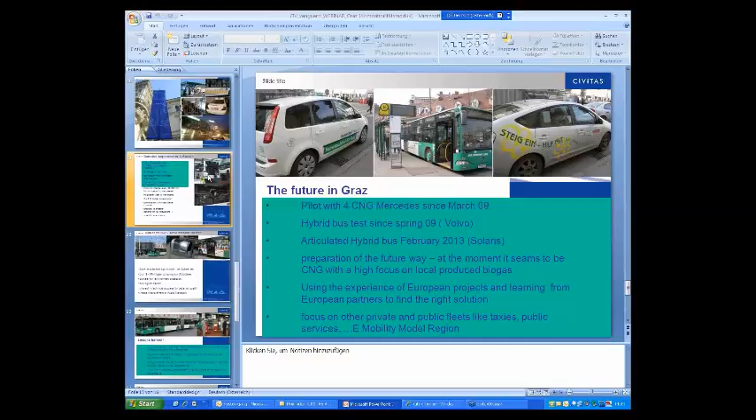Okay, just a moment and go to the full screen.

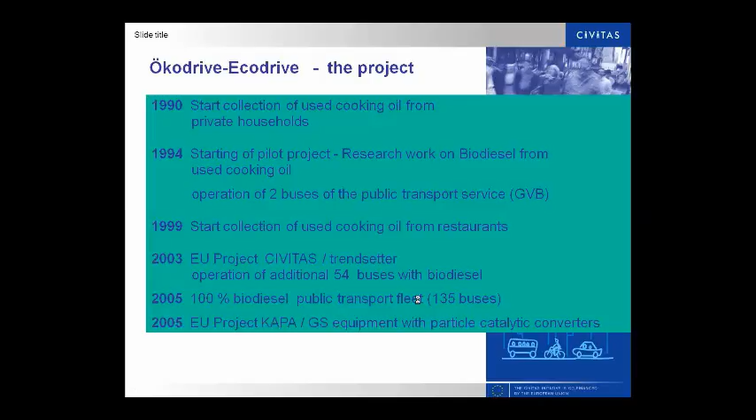And you see it, I don't know, do you have from my screen also this? I think I have to clear this part. Maybe it doesn't work. So maybe you can make it smaller. That also doesn't work. So maybe you don't see all my pictures.

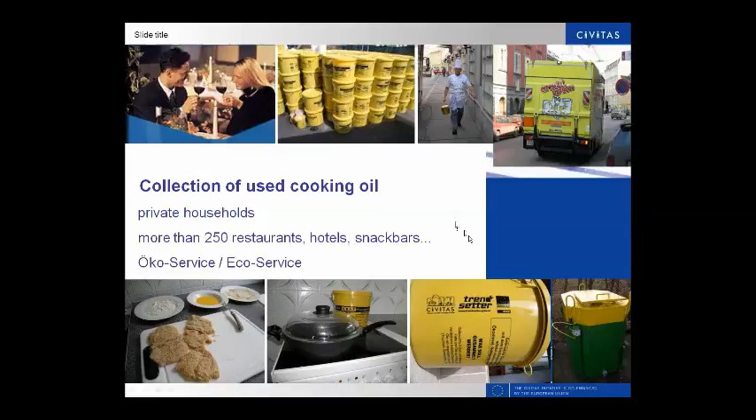I don't know. Anyway, you see on the right side there is a bigger collection equipment which also can be heated, and this is the collection equipment for restaurants. So just to see how it runs, and we have already about 250 restaurants where we collect our used cooking oil. So what's now? Doesn't look okay.

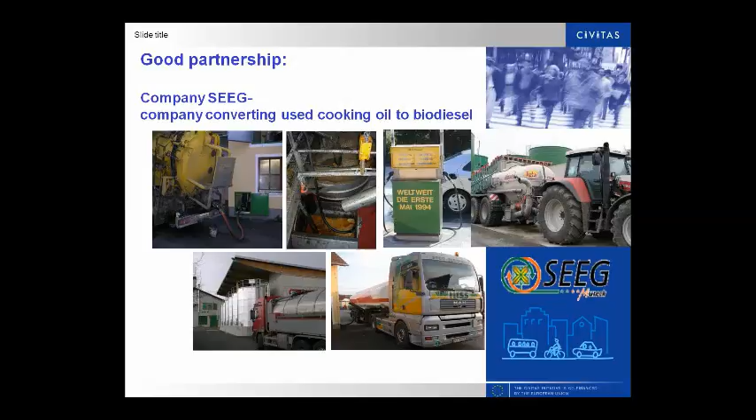So at the end, such a project means you need a good partnership with other partners, and one of the partners is the company who produces the biodiesel. Also some images here of where the collected cooking oil is brought to a company about 40 kilometers south of Graz, and they produce our biodiesel in this company.

We had also research behind it, and also a company that produces the plants for the production of biodiesel, which is BDI, also situated in the surroundings of Graz, and as I said, the cooperation with the Chemical Institute of the Technical University, and the city-owned transport company in Graz. Just some impressions. As I explained before, Professor Mittelbach, who was something like the Pope of biodiesel in Graz.

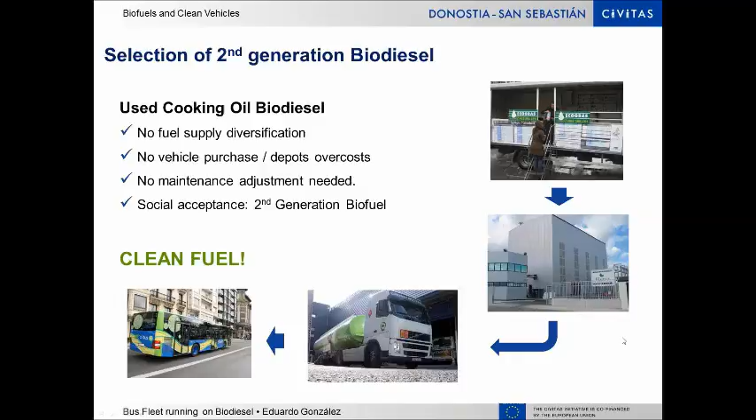We started with CIVITAS at the end of 2008, and the first thing we did was purchasing a fuel mixing station, so we were able to blend the biodiesel directly to the buses. We already had 2 underground tanks of 60,000 liters each, and we dedicated one to the biodiesel, the B100, and one to the diesel.

In 2009, we started to apply, I would say, the CIVITAS schedule of blends, but we went always forward to this schedule, and we applied blends to the whole fleet. We started from 16%, as we see here in the graph, and through the years we reached an average. This graph is for an average blend. So this means that here at the end of last year we reached 35%, but in this 35% we had

the main blend in the 120 buses was the B30, 30% of biodiesel and 70% of diesel, you know. But we also had vehicles at B100, totally with biodiesel. Those were, I think, 12 vehicles, and also B50. We had vehicles with B50.

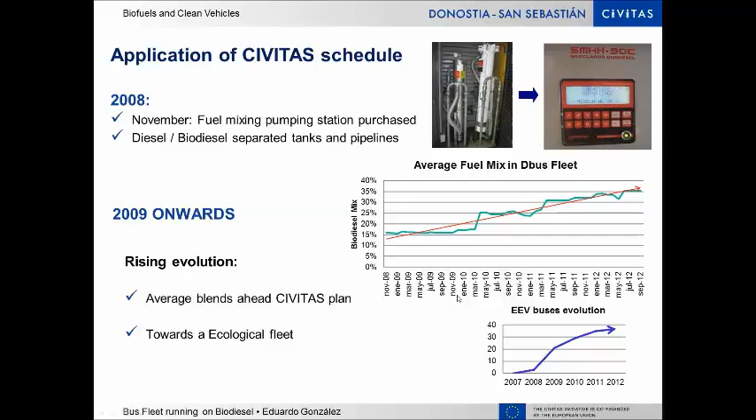We not only did apply this biodiesel; during these 4 years, it's important to notice that we also had a high renewal of the fleet, and we purchased up to 39 EEV standard vehicles, you know, which is an optional standard that goes toward the Euro 5, the obligatory Euro 5. Okay.

Talking about the steps or the keys of the application of the biodiesel, in our case it was to obtain the certificates and allowances, certificates of the quality and the supply guarantees of the biodiesel. But this is not only for the biodiesel; it's also for the diesel. You have to control very well the quality of your suppliers to be sure not to have problems with your engines.

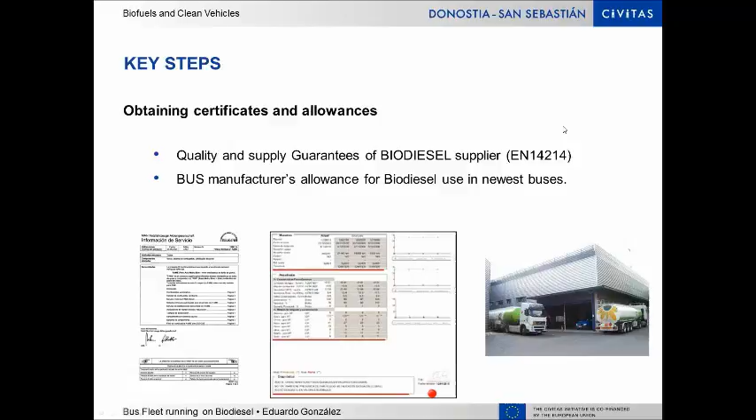But also, mainly in the newest buses that were under guarantee, we had many problems to get the bus manufacturers' allowance to use the biodiesel, because their first reaction was not to use the biodiesel, and that if we used any kind of blends of biodiesel, we would lose the guarantee. But we forced them to allow us, and that's how we could start. Okay.

Another key step was when we started with B16, and the first thing that we noticed was the fuel filters were very dirty during the maintenance, and this mainly happened in the oldest buses. We thought this was because of the cleaning properties of the biodiesel, but this was a minor problem. Just with the maintenance, changing the filters, it was solved.

And the next problem was when we jumped to B20, but only in some buses that were manufactured between 2001 and 2002, we had to change some fuel hoses that came out from their position. They became bigger because the material was attacked by the biodiesel, but the bus manufacturer already had a solution, another reference of fuel hoses specially designed, so just changing those hoses, it was solved.

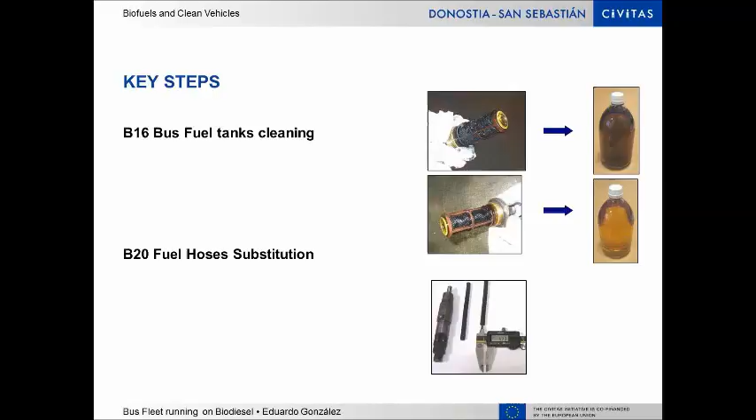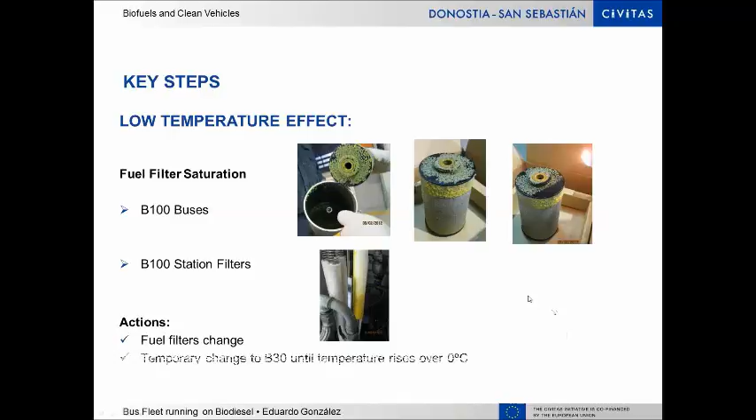In this other picture, we can see the cartridge, or the filters of the pumping station, that were also affected. But as the filtering surface was much bigger, we didn't notice it and we didn't have to change it. We just waited until the temperatures got higher, and this was automatically solved by itself. Okay, yes, that's what I said, I think.

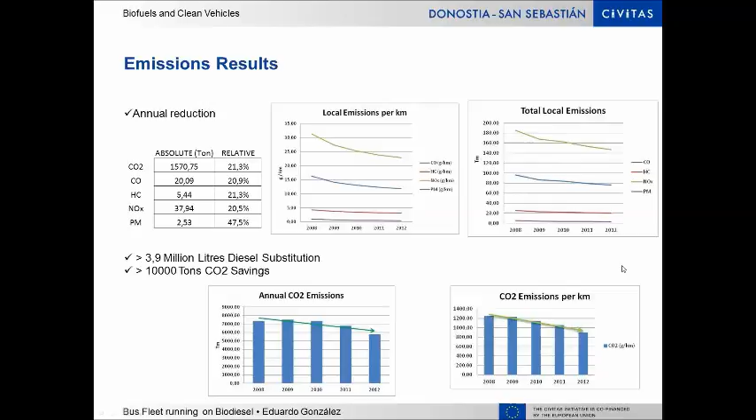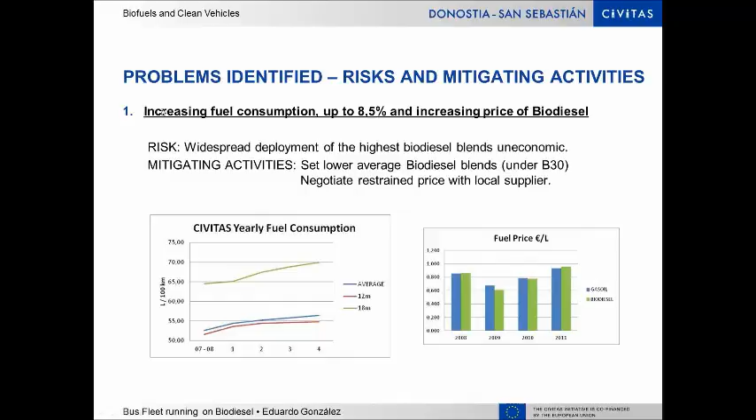Okay, another problem is the saturation of the fuel filters that we've seen before at the start of the use of the biodiesel, mainly in vehicles that have never used biodiesel, so they have all the dust inside their fuel tanks being removed by the biodiesel and so on. So, sorry.

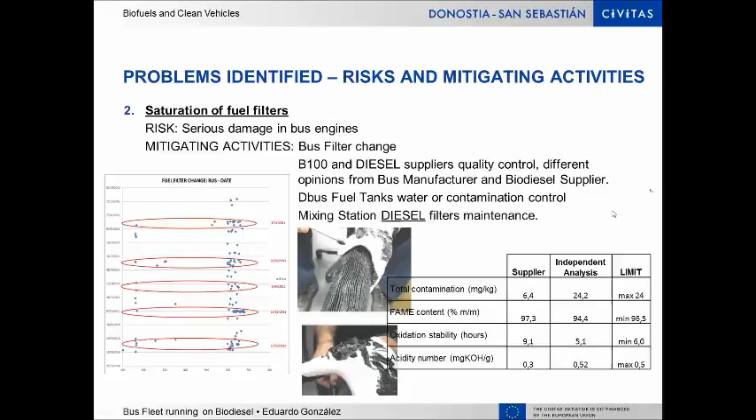So you have to control very closely, for example, the water contamination in your fuel tanks, and also have a very proper maintenance program in the filtering stations and so on. Okay, let's see something more. Yeah, sorry.

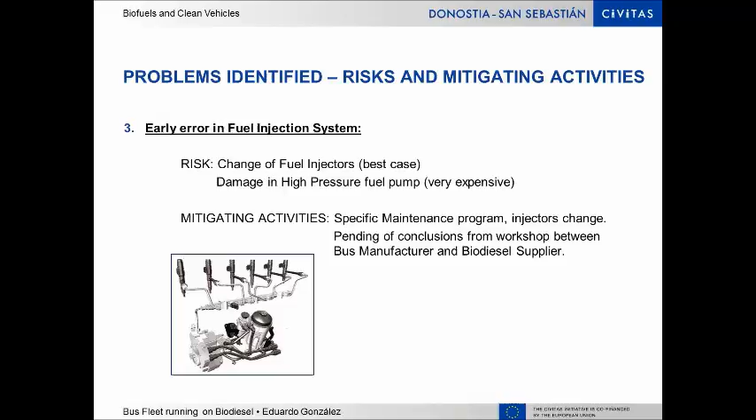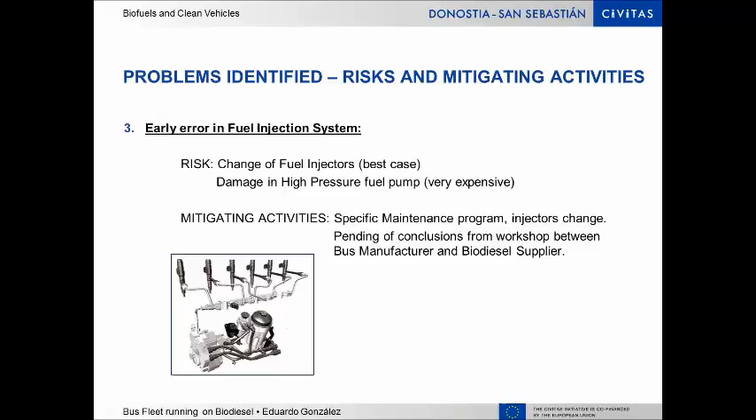So anyway, it's very important to put the biodiesel and bus suppliers in contact to discuss these points and clarify them, whether close analysis of the quality of the fuel is needed, and discuss the results and so on. We have done this, but it's very difficult to find common ground. It's very difficult indeed to get both at a table and discuss these themes.

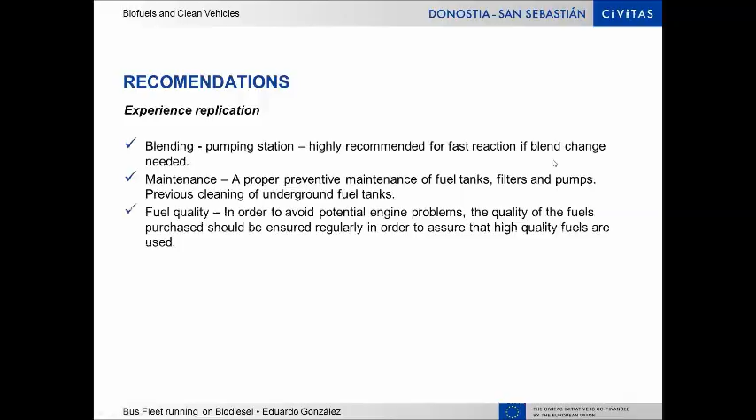Okay, and these next slides are just a summary of the recommendations to succeed in the replication of our experience. As I've been saying, it's very important to have this blending pumping station to react very fast when you need to downgrade the blends, as happened with the B100 vehicles and so on. It's very important. A proper maintenance program of this fuel station, the filters, the pumps, everything has to be checked and very closely analyzed. The fuel quality is also very important, as we said, to ensure the quality of what we are using.

Increasing patterns: in our case at least, we've seen that it's very important to go step by step, not making big changes from not using biodiesel to B100. I'm sure that that way you would have had many more problems than in our case.

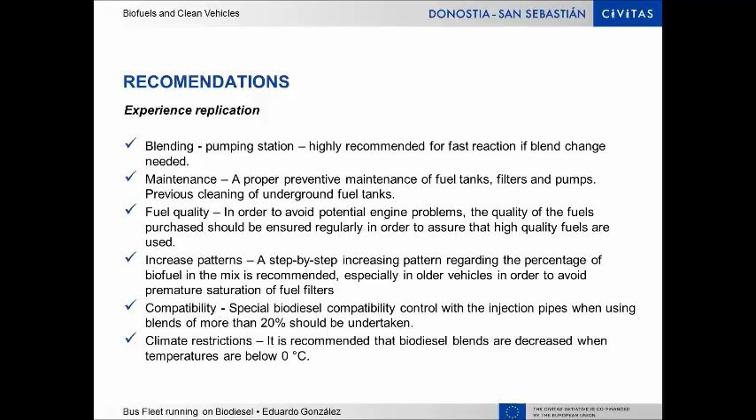And as we've seen, there are some series of vehicles, but I think that is just the old ones, because the new vehicles nowadays are prepared. The fuel hoses are prepared for biodiesel, so I think that's not a problem right now. But if you are trying to apply biodiesel to vehicles around 10 or 12 years old, you should at least check that compatibility. And with the climate restrictions, below zero you have to control and downgrade the blends.

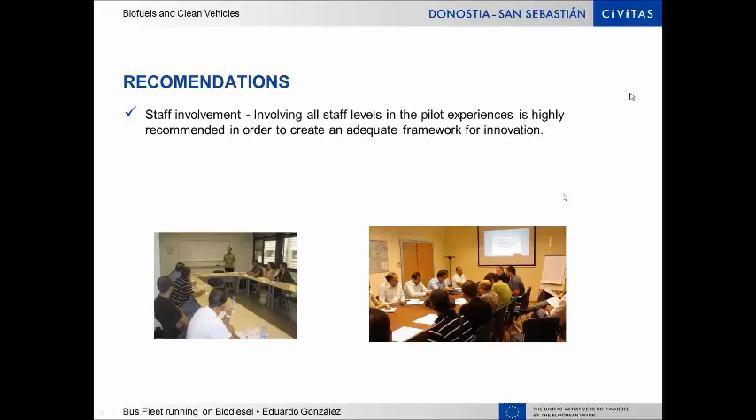Okay, this is just about the involvement of the staff. This is very, very important, from the maintenance department people to the drivers. It's important to involve them in the experience, to make them participate, and it's the only way that they accept the biofuel from the beginning, because if not, you can have many more problems apart from the technical ones.

And also the staff, but also the stakeholders. We have done many workshops to join all the people involved: the fuel suppliers, the people from the municipality, the bus manufacturers, all joined together to talk about the experience and have very quick communication channels to solve the problems immediately.

Okay. About the future plans, as I said, there is a lot of work to do about cooperation between the manufacturers and the suppliers, because it's a stupid position. I've been here with an MAN representative technician, and I am still waiting for them just to make a meeting with my biofuel supplier, and they are always delaying the date. So it's a stupid position. They just don't want to talk together, and it's needed.

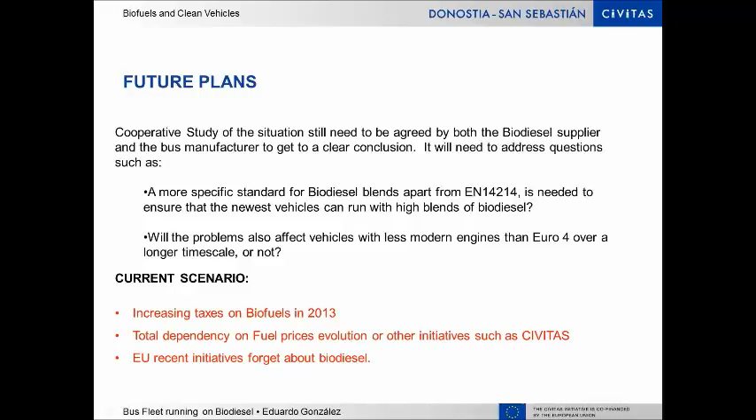And apart from that, 2 or 3 weeks ago, I read the latest European Union initiatives about biofuels, and I was surprised because these initiatives were focused totally on CNG, hydrogen, electricity, and so on, but didn't focus on the liquid biofuels like biodiesel and bioethanol, because it's supposed that they are mature technologies that are already implemented, but the truth is not. So I think that's a very dark future for the biodiesel, at least. Okay, that's all. Thank you.

I don't know if I've adjusted to the time. Not really. Sorry so much. No, I think that's okay. But I hope participants were very attentive and are able to ask a lot of questions now. I'm just checking. There is no hand raised, and I don't see any question for the moment. No. Okay. I've prepared also some questions, but maybe I will just keep them for the discussion part.

So I suggest you move to our last presenter from the city. So it's Gustav from Aalborg. You've been working, Gustav, for the city of Aalborg in Denmark since 2006, mainly on sustainable transport projects, and you have been the measure leader for implementing biodiesel in fleets of the city, 50 buses and 50 postal service vehicles. And you worked also on the Archimedes project since 2008, as measure leader, and also as local dissemination manager. So I will give you the floor, and you can complete what I've just said if you wish.

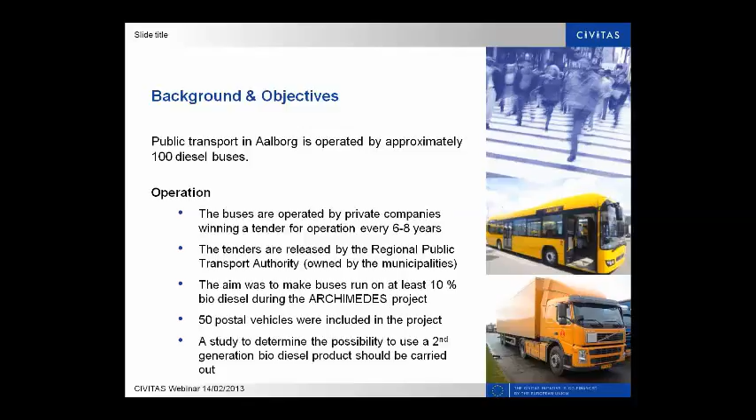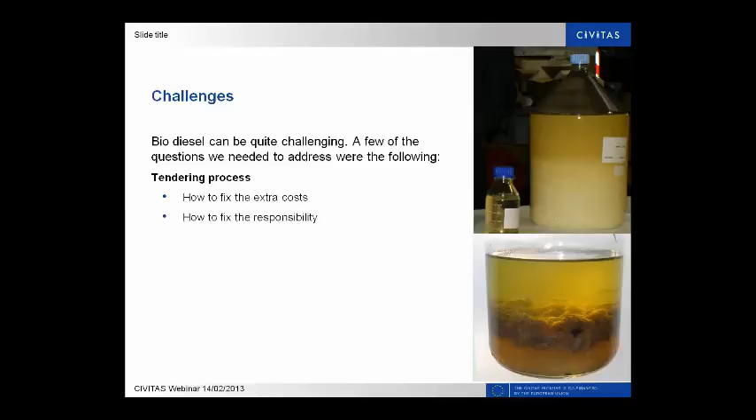And also we had an objective or a goal to see what kind of biodiesel that we were using. So we carried out a study in the use of second generation biodiesel as well, and what challenges that may cause. There were a lot of challenges because we were quite new to this, and we had to set up the operation with private companies.

So at the first we met a challenge in terms of how to tender public transport operation on biofuels, because we couldn't just force the private companies to operate on biodiesel. They also need to get paid for it, and we asked them to come with an assumption of what the extra cost would be on operating on this. And since they were also new to biodiesel, they might have overestimated the extra cost for going on biodiesel.

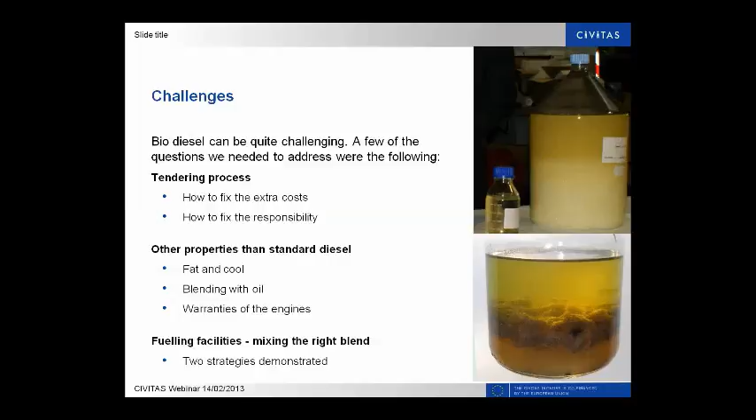Also, we had some challenges in terms of how this biodiesel product would react when it was cold, and it's quite cold in Aalborg in the winter time. There were challenges that the biodiesel was blended with the oil in the engine and caused troubles on that. And we also had some issues about how to guarantee, if the engines were breaking down because of the biodiesel, what to do then. And then we had finally a challenge on how to distribute the biodiesel, and we ended up in 2 different solutions that I will come back to later.

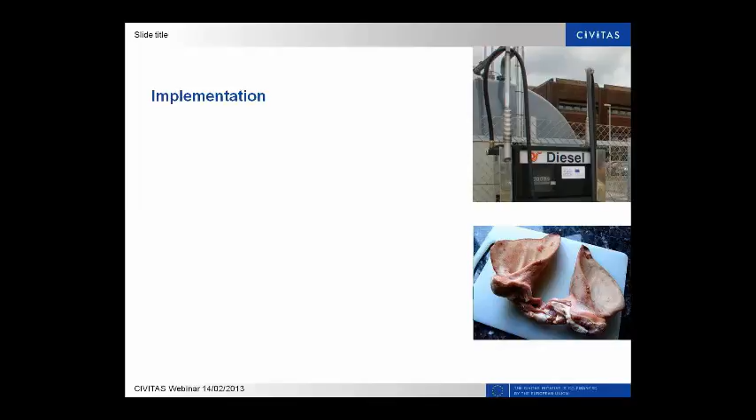So the implementation of the project consisted of the tender that we did for public transport. It also was the selection of the biodiesel products, and finally to set up the fueling facilities for the biodiesel. The tender for public transport was carried out in 2009, 1 year inside the Archimedes project, and after we had done the research on what we could do with second generation biodiesel. So the tender was carried out in 2009 and just into 2010 where the winning bids were selected.

And we set as a requirement that the buses should operate on second generation biodiesel, and we even put it as specific as AFME, which is an abbreviation of animal fat methyl ester. So it was one rather specific product made in Denmark that we would like to use. And the extra cost that the private operators came up with would be covered by the CIVITAS Archimedes project.

So the blend that we selected was at least 10%, but the Public Transport Authority would have the opportunity to raise the blend during the project, of course paying the operators for doing this. And the biodiesel made from slaughterhouse waste was selected, as I told before. And at the end of the Archimedes project, we also tested 20% of biodiesel in the buses.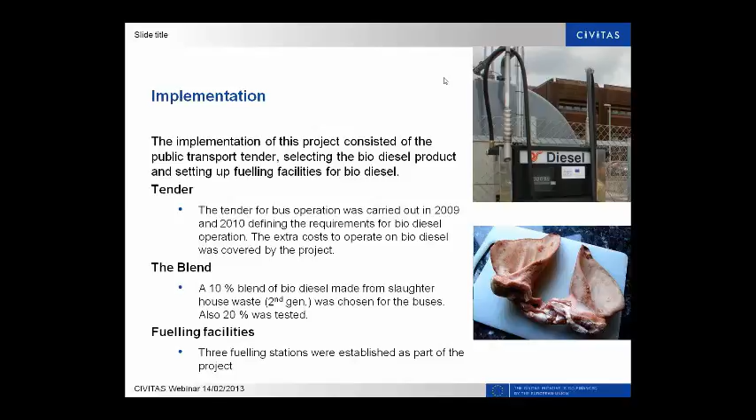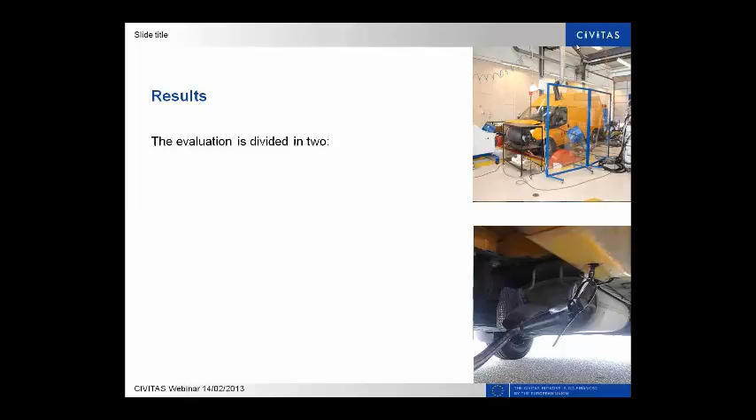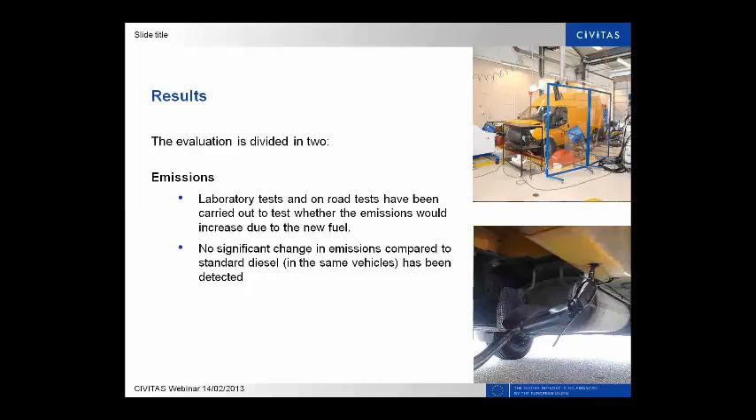So the results, the evaluation of this has been divided into two. First we have the emission measuring. We performed laboratory tests and on-road tests to see whether the local emissions from the vehicle would increase due to using biofuels. And the conclusion here is that there's no significant change in emission compared to the standard diesel, which was a good result, because we actually expected that emissions could go up due to this. That was what we were informed by the technical institute that carried out the evaluation.

And then we have the carbon emissions. The reduction of carbon emissions was calculated based on the real consumption from the vehicles. Each month the bus companies and the Postal Service reported their fuel consumption from the involved vehicles, and the sum of biodiesel is equal to about 1,000 tons of carbon dioxide saved during the trial period, which was from 1st of October 2010 for the buses and from 1st of April 2011 for the Postal Service vehicles. Both projects ended in December 2012.

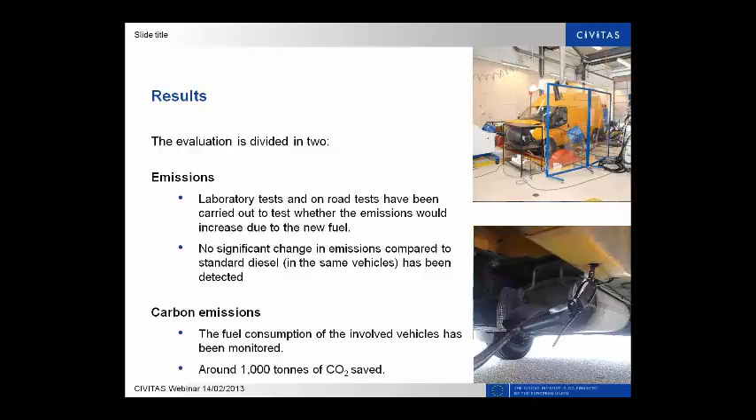So the conclusion is that we overcame all the challenges. We were new to this when we started. We were quite anxious going into this, and we needed a lot of persuasion towards the private companies operating the buses and the Postal Service, because obviously they are very keen on their machinery, and they were a bit worried about this. But it was possible to operate buses and delivery vehicles on this second generation biodiesel of up to 20% without any problems recorded.

We have been saving fossil fuels and thereby also reducing the carbon emission by 1,000 tons during the two years of demonstration, and we did it without significantly changing the level of other emissions. One challenge that we didn't overcome is the extra cost that Eduardo also was talking about; this product is quite a bit more expensive than ordinary diesel.

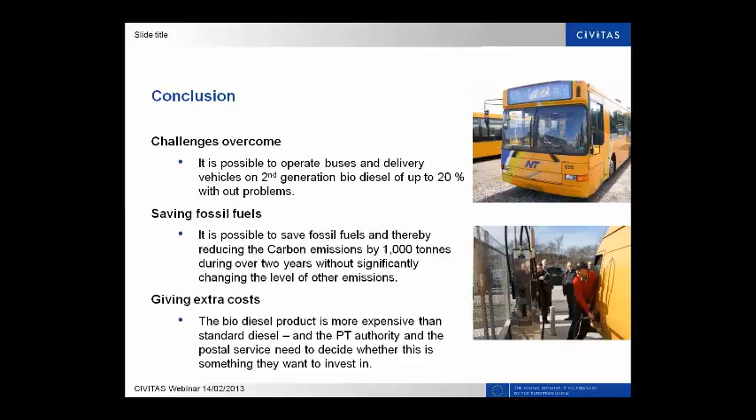So the Public Transport Authority and also the Postal Service need to decide whether this is something they want to invest in to obtain their environmental targets or to get a green profile. And as is the case in San Sebastián, it looks very difficult to continue on biodiesel here in Aalborg. The demonstration has already ended in the buses and also in the postal service. So good things and bad things from this project.

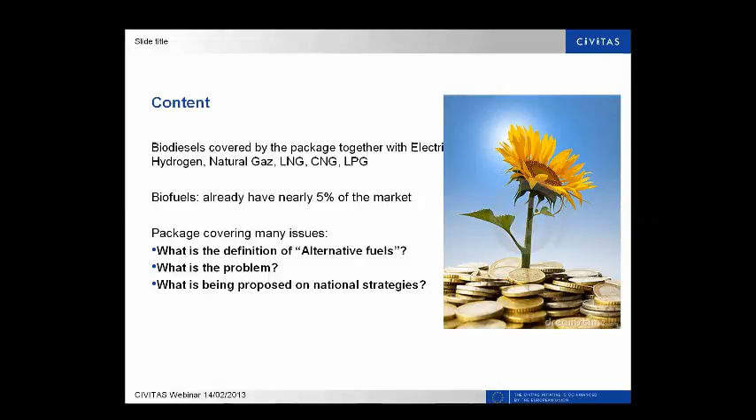We saw that with biofuel it's not the case. And when they mention biofuels, they also note that biodiesel most of the time doesn't need special infrastructure. So maybe that's also why it's not really developed in the document.

And they also refer to national strategies to be developed by the member states, and I will say a little bit more about that because it might be relevant for you. You might not be from a member state representation, but as a city representative, I think you still have a role to play and you have things to say.

So in this package, the European Commission suggests elements for the national strategies, and as you can see on the slide, they refer to supporting measures with direct incentives and tax incentives. They refer to the use of public procurement, to which measures to implement for deployment and manufacturing support, and also research and development. And they also define possible measures to implement, like alternative fuel vehicle incentives.

So it's very short what I just explained, but I wanted to cover the European aspect a little bit, because after looking at a very interesting example at the city level, it can be interesting to link it with European work, because we are, of course, within the CIVITAS framework. For your information, these two documents were published two weeks ago, as I mentioned already. So if you want to know more, you can read them.